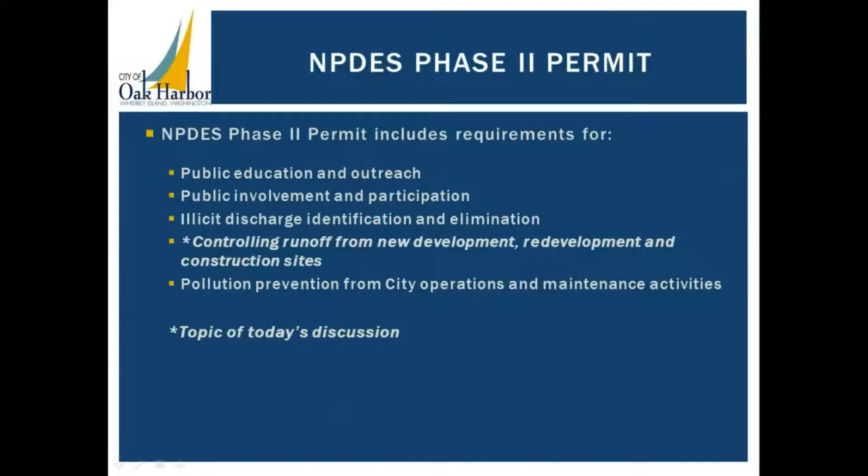So we have 5 basic requirements of our NPDES Phase 2 permit, and that's stormwater related. We have to provide public education and outreach. We have to have a program for public involvement and participation, a program for illicit discharge identification and elimination. We have to have a program for controlling runoff from new development, redevelopment, and construction sites, and that's the topic for today's discussion. And then the final one is we have to have pollution prevention measures from our city operations and maintenance activities.

So in 2007, we were issued our first NPDES Phase 2 permit. It was good for 5 years, and that required us to allow LID practices. Then in 2009, based on a Pollution Control Hearings Board decision, the permit was modified to require us to implement LID whenever it's feasible. And our current permit, which was issued in August of 2013, states that no later than December 31st of 2016, we shall review, revise, and make effective our local development-related codes, rules, standards, and other enforceable documents to incorporate and require LID principles and LID best management practices.

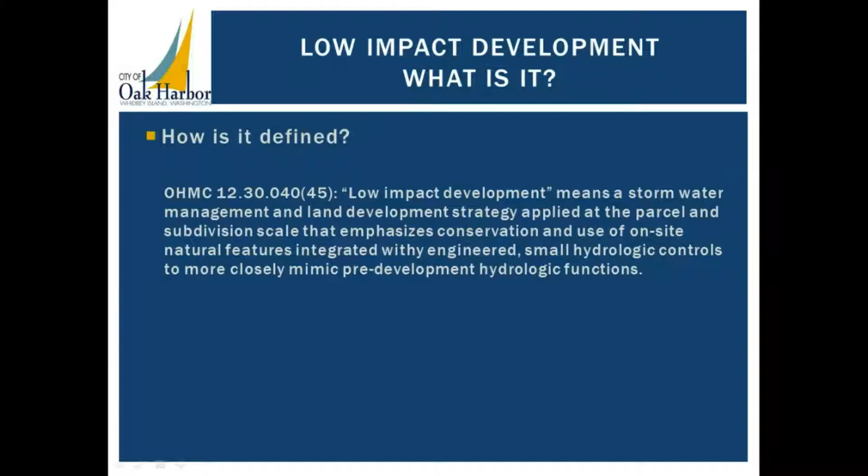So what is low-impact development? Oak Harbor Municipal Code has a definition that states low-impact development means a stormwater management and land development strategy applied at the parcel and subdivision scale that emphasizes conservation and use of on-site natural features integrated with engineered small hydrologic controls to more closely mimic pre-development hydrologic functions. What does that mean, really? Simply put, low-impact development requires that most stormwater stays on site when you're doing a new development.

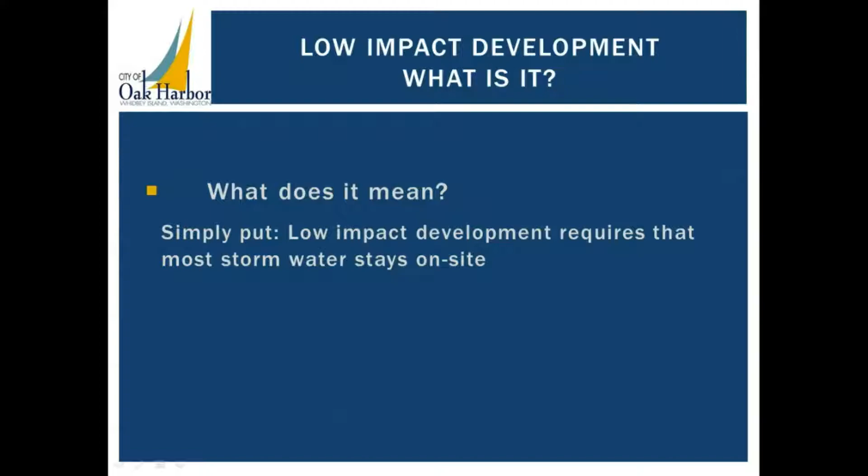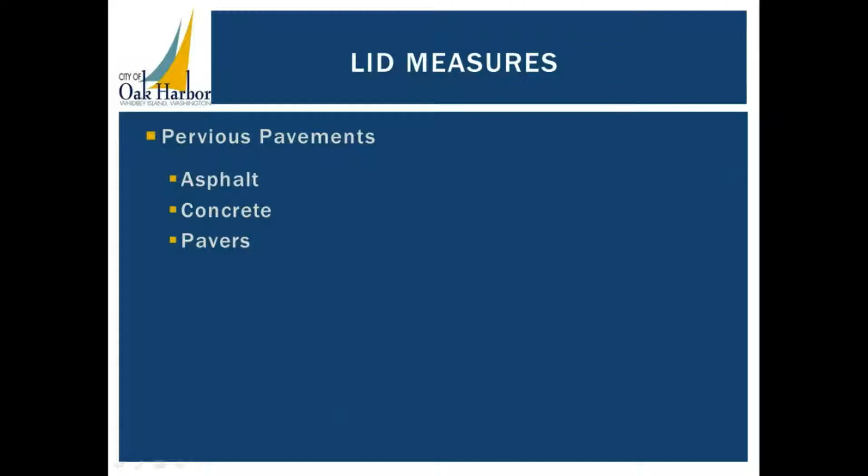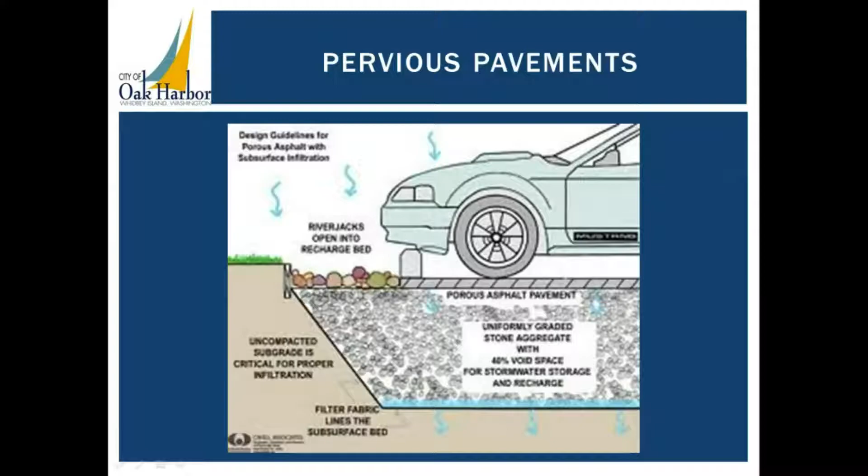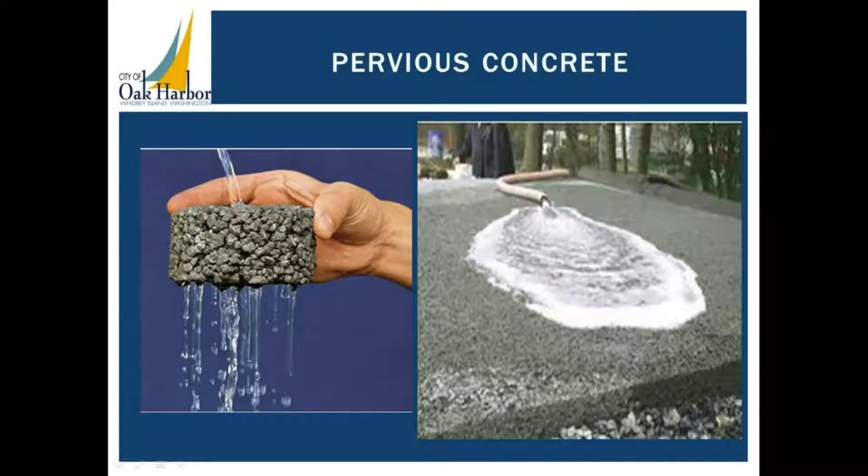So some LID measures are pervious pavements - asphalt, concrete, and pavers. This is just a schematic of what pervious asphalt would look like, how it would be constructed. Pervious pavements are one of the workhorses of LID development. Here's some pervious concrete, we have some out at Fort Nugent Park. And the water basically doesn't leave that concrete area if it's working as designed. And pervious asphalt. Pervious pavers are another option if people want to go that way, but we don't see too much of that.

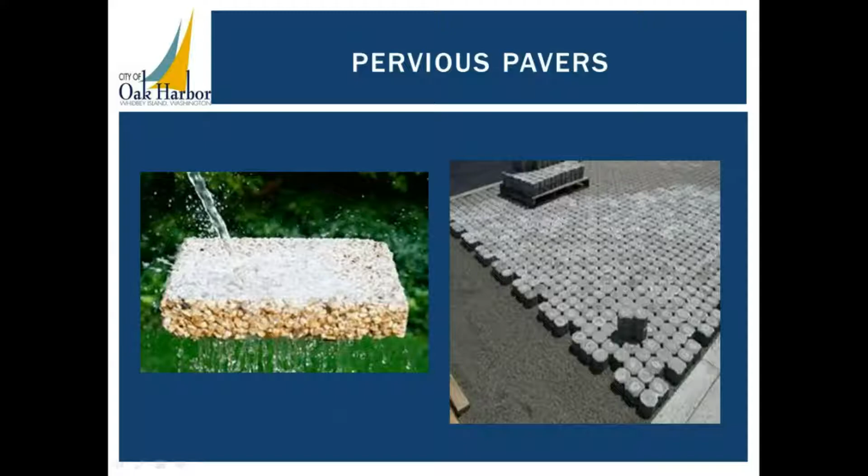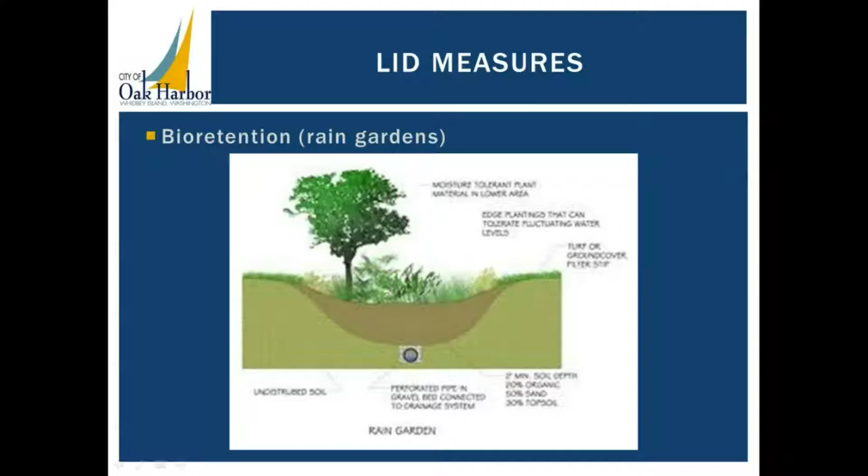Another workhorse of LID is bioretention, also known as rain gardens. They can be street side in the public right of way, or they can be on private property. We'll talk a little bit more about that later and some of the challenges with each.

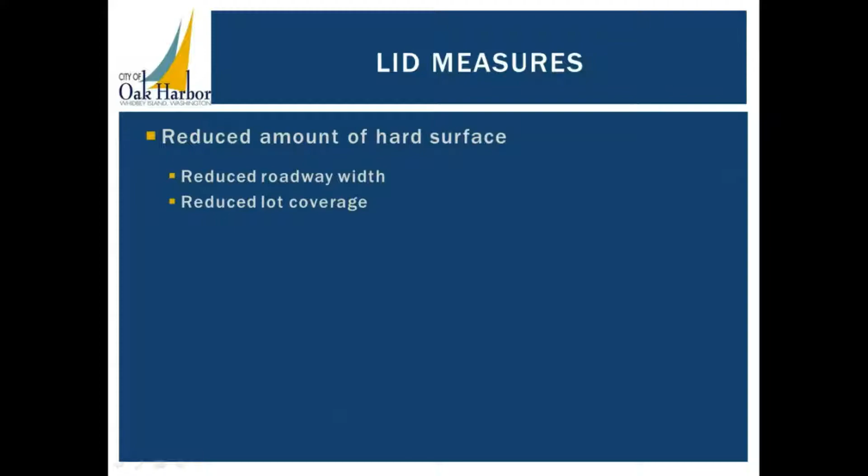Another LID measure is reduced amount of hard surface, such as reducing the roadway width or reduced lot coverage. So many LID developments have very narrow roadways, which can present some challenges.

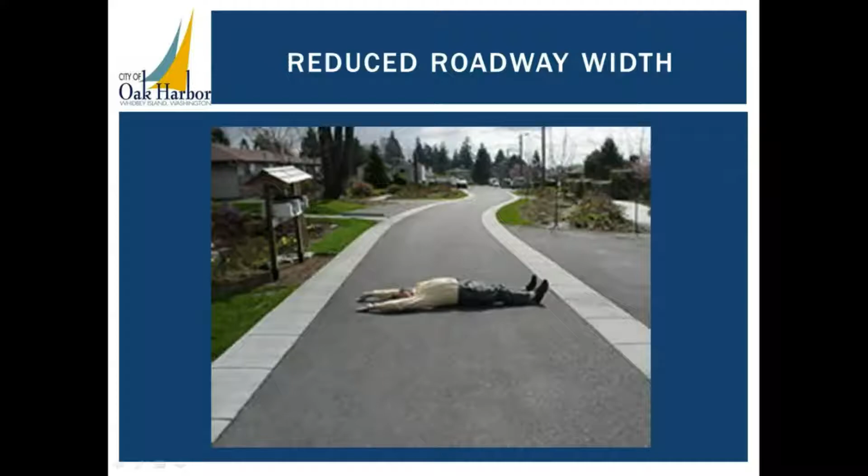If that's still - yeah, no, you see his beard. It can present some challenges making sure that there's adequate access for fire trucks and solid waste collection. And just people, yes, and just people.

Some ways that DOE has suggested that we can reduce the hard surfaces on lots are shared driveways and those kinds of things.

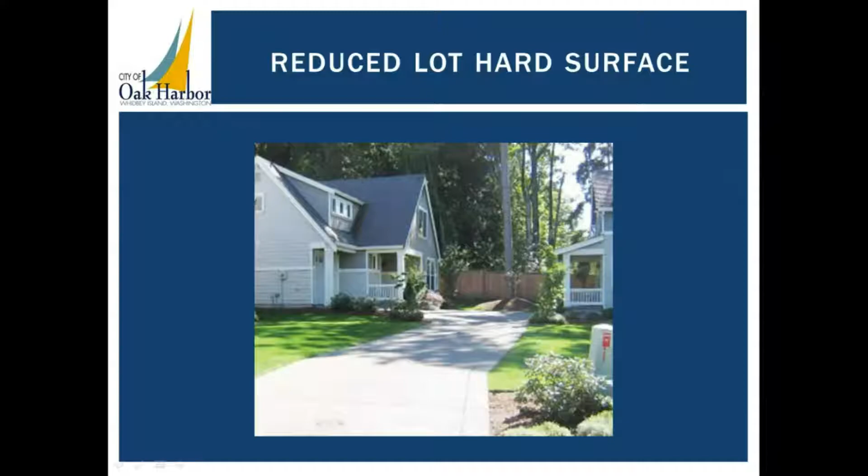DOE has suggested a dispersion area, which is an area left in its natural state when developing a subdivision, where stormwater can be directed to disperse. It means leaving a large area of the subdivision undeveloped.

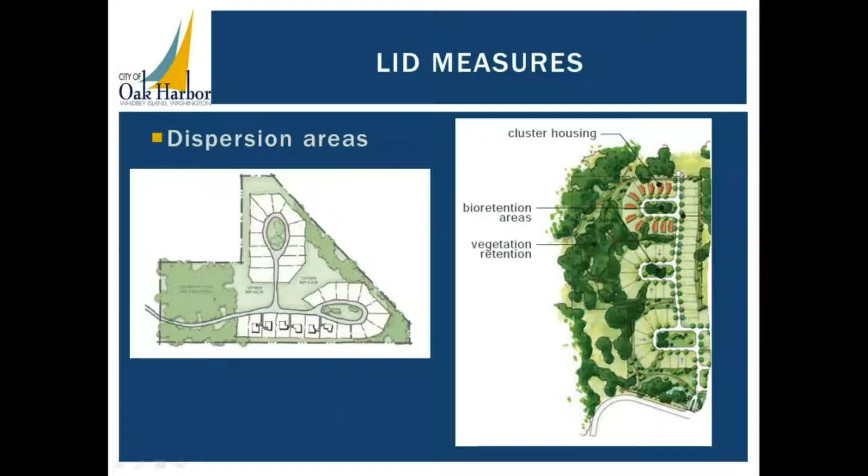This only applies to new development and redevelopment, not existing houses like my neighbor's and mine, even though we get a lot of runoff from both. His is pumped out of the backyard. It wouldn't apply unless the house were torn down and the property redeveloped.

The more common application in redevelopment would be in a commercial setting. The examples Kathy's shown so far are just residential, but keep in mind this also applies to non-residential development.

I'm going to turn this over to Dennis now to talk about our efforts to date. Are there any questions so far?

Just a bit of background: does modifying this to require on-site handling, meaning no off-site discharge from an individual property, still require installation of a detention facility? Generally, yes. But if you're going through all the source treatment and theoretically don't have off-site discharge, why are you going through on-site stormwater control?

Each design will be very different depending on the soils. The DOE is requiring intensive soils investigation as part of the early part of the project. They have to do a soils map showing where water can be put back into the ground. In some cases, water can go back through pervious pavement and bioretention; in others, they'll need both that and ponds.

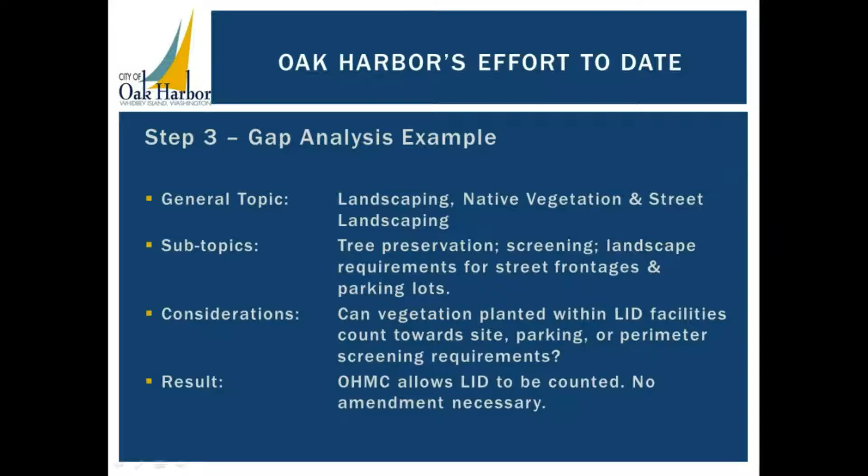So to make it easier, let me give an example. The general topic I picked was landscaping, native vegetation, and street landscaping. The subtopics prescribed by the Department of Ecology included tree preservation, screening, and landscape requirements for street frontages and parking lots. And the consideration was: can vegetation planted within the LID facilities, such as bioretention facilities, count towards site parking or perimeter screening requirements? So you have to ask yourself, does your code address that consideration? In our case, yes—we do allow LID to be counted towards the vegetation included as part of parking or perimeter screening. So we're essentially checking the box that says we've addressed this consideration, documenting where it's met, and moving on to the next one.

So that's been our process to date. The documents we've been using for this exercise—obviously the Oak Harbor Municipal Code carries most of the weight because of the work done about 5 years ago. We've got regulations in all of those documents that potentially could or should deal with LID. The last one is the comprehensive plan, which is more policy-oriented, but with our most recent update, we've thoroughly addressed low-impact development in our policy for the comp plan.

So the next step is step 4, which is what we're entering into at this point. Brad and I have been locking ourselves in my office working for stretches of time to see where in those documents we have existing code that addresses those considerations. We've got a 24-page document that identifies each consideration and the code that sometimes appropriately fits or addresses it.

So what that's doing for us is identifying the gaps. Then we ask: is there some way we need to address that gap? Are we addressing it in some other way? Can we amend or change a code with some wording to address that consideration? Or if we don't feel a change is necessary due to a conflict with another regulatory document we've adopted, we document that and indicate we're not going to amend the code because it would conflict with that document. That's pretty much the step we're engaged in at this point.

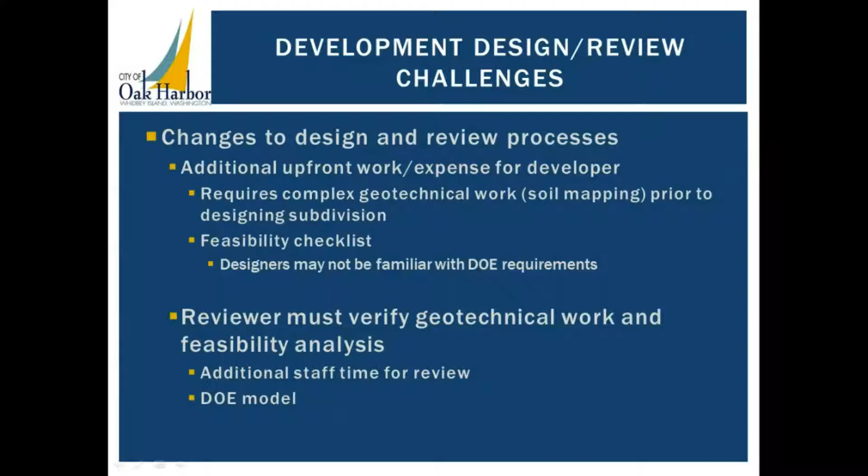There's also a feasibility checklist they're going to have to go through. Remember, pervious pavement and bioretention are the workhorses of LID. They'll have to go through this feasibility checklist based on the soils mapping - can they do pervious surfaces, how does bioretention fit in - and then work down through other LID measures to see if those will work. That's going to determine the size of any on-site pond.

There's a couple lists depending on the size of your project, and you have to start at the top. The first thing that applies to your soils and project you have to use. If that doesn't apply because of infeasibility criteria, you go to the next item. Pervious pavement and bioretention are actually the second items on these two lists, but the first item in each list is going to be largely infeasible for most communities. So we already know pervious pavement and bioretention would be the workhorses for most LID developments.

One of the challenges is we're not sure that a lot of the engineers and designers understand what's coming. Brad and the engineering staff attend a lot of trainings from DOE on this issue, and they come back and say they don't see many consulting engineers at the classes.

So this is going to be new to them. It's going to feel very different and feel like we might just be being difficult because we have to require that information, the soils mapping. That has to be submitted with the application in order for us to stay compliant with our permit. So it's not that we're not trying to be helpful, it's that we have to have that information.

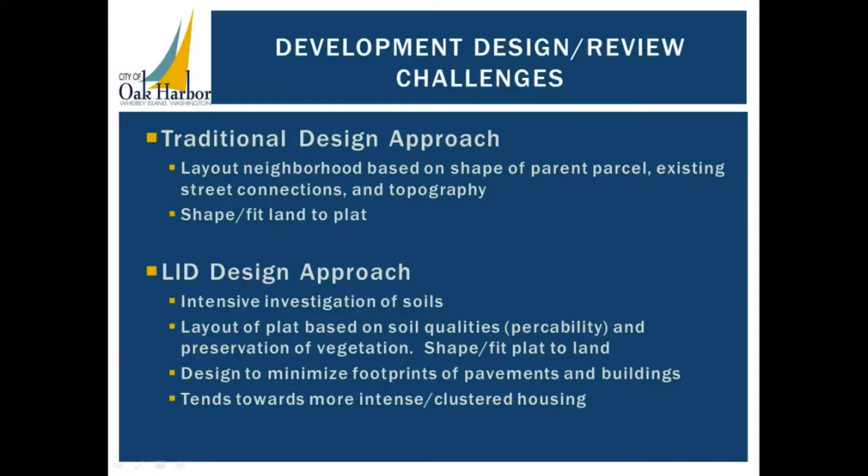In the traditional design approach, the layout of a neighborhood is based on the shape of the parcel of land, existing street connections and topography - basically they shape the land to fit what the developer wants. In the LID approach, which is what we're moving to, there has to be investigation of soils, and the layout is based on soil qualities and preservation of vegetation. Essentially we're shaping the plat to the land and looking at designs that minimize the footprints of pavements and buildings, trending towards more intense and clustered housing.

So the one on the left is more traditional, the one on the right is most likely what we're going to see developers moving towards. These are examples I pulled from the low impact development manual. We're still going to stick with a gridded street system. The main difference is these have the same amount of lots, except they're much smaller and tighter together on the right, and they've reduced the amount of road.

The low impact development manual and DOE manual don't really get into street grid layout and transportation. They like to see streets minimized, but we have to balance our transportation system with LID, so we're not going to see a lot of dead ends.

So now it's my turn. But before I get into that, I'm going to go back to this picture. Something we've touched upon a little bit, but this is a great graphic example of it, is cost to the end user. If you look at the example on the right with all that green area, that's most likely ending up in a tract owned in common by the HOA. Somebody's going to have to maintain that.

While it's typical to have drainage tracts and other types of tracts in subdivisions today, I think it's safe to say they're much smaller than what we see here. As we all know, areas that aren't maintained become holding places for trash, etc. So there's an increased cost at the back end of the process for the homeowners associations as well.

Can you hold that for just a second? Sure. But the city doesn't have any authority to enforce homeowners' requirements for maintenance. We don't, unless it's in an area where it's also part of a drainage facility which is connected to our public system. My point is that at some point, someone's going to complain if it's not being maintained, and somebody ends up addressing that particular problem. But you're right, we do not enforce CCRs and the requirements.

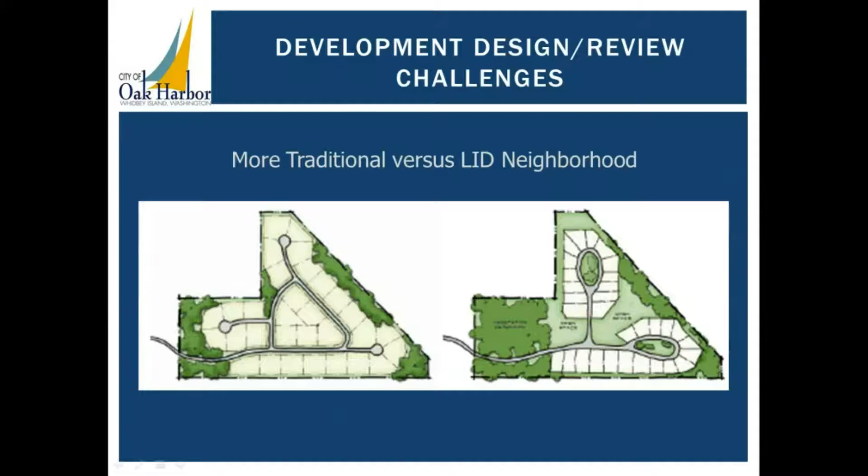Smaller setbacks. Brad has shown us some examples of some 3-story homes that I don't even want to contemplate because they're just, well, they're not Oak Harbor, that's for sure, but it's hard to envision a product like that in our community because it has to be one that people are going to buy. That's another part we're still struggling with. It's not really in our purview, but we're still trying to figure out how this all works. And so that's the housing structure change.

It doesn't work very well when we're talking about single-story houses for folks getting up there in years who aren't looking for stairs. How does this all work when we have an increasing senior population? If we're still talking about single-family housing, they want single-story homes. That's pushing everything out, making a greater footprint on the lot. So competing goals, and again, trying to balance those things.

Speaking of competing goals, how is this going to really be in conformance with the Growth Management Act? Is it going to be necessary for us to increase our densities to meet LID requirements? Yeah, we can do that. We can say we can build a more dense single-family product. That's going to skew our overall housing mix, and we have to keep our eye on that.

But really importantly, we have a requirement to provide a range of housing for all needs and all income levels. So that's not just compact single-family standalone homes. We have an obligation to plan for and provide land for things like government-assisted housing, low-income manufactured home products, multifamily housing. And I think it remains to be seen how LID factors into some of those site planning challenges.

Another big takeaway for the council today, I think, is that unlike many of the code projects we work on, where we feel reasonably comfortable that we've gotten most of the answers to the questions before we come to you with it, there will be some things that I don't think we'll know the answers to until we start working on actually implementing this. And frankly, we're not very comfortable with that.

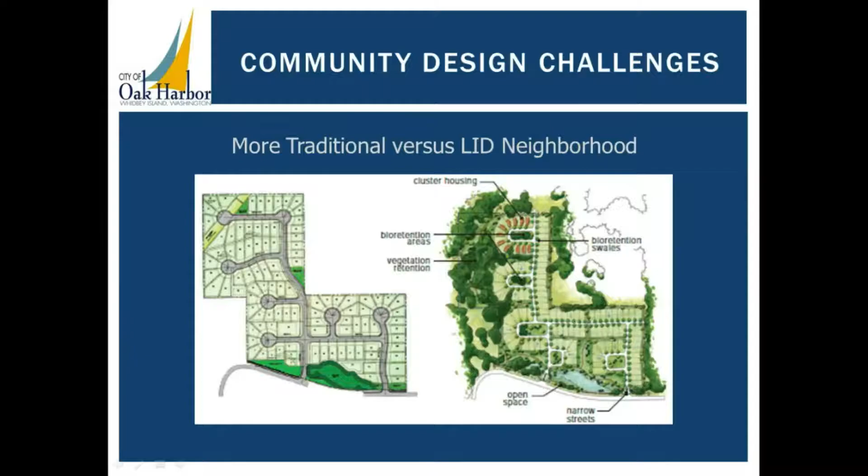So again, here's a similar example to the one that Brad previously provided. You can see the difference in layout and some of the issues we've already talked about.

I'm going to talk about what we see as maintenance challenges once these developments are put in the right-of-way, which Public Works is responsible for. Pervious roadways and sidewalks require new specialized equipment to maintain, and we don't have that. It's going to require additional staff because it'll take more effort and time. And then the bioretention, if it's in the right of way, who's going to maintain that? To keep it attractive and functioning as designed, it requires a lot of handwork, weeding, and effort.

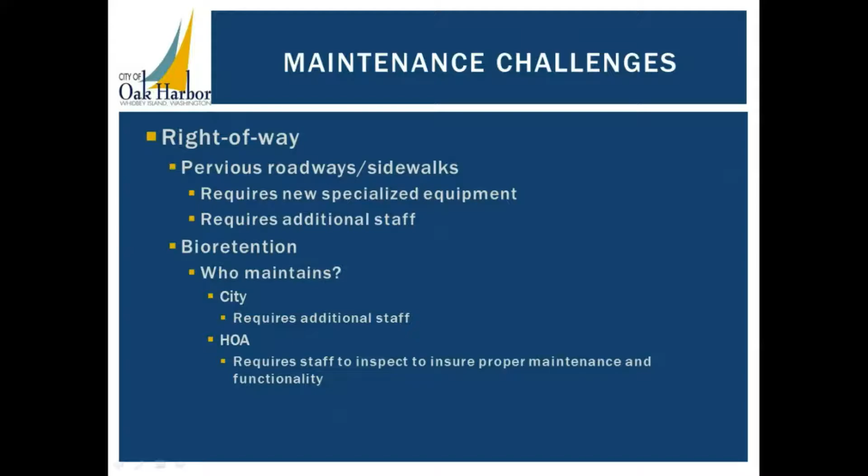If it's city staff, it's going to require a significant increase in the amount of staff we have to do that. And if we put it on the HOA, it will require staff to go out and inspect it periodically to ensure proper maintenance and functionality. We'll have to look at that on a case-by-case basis. But if we're going to allow bioretention in the right of way, there has to be a decision as to who's going to maintain it. There will be an increase in city staff effort—it's just a matter of degree, whether we're maintaining it or just inspecting it periodically.

Question? Oh, I do too. Sorry, excuse me, go ahead. Oh, okay, well I am.

I know you don't have a crystal ball, but based on trends, you know this well. How often do we get a new development with these new right-of-ways and new things that need to be done? When do we expect we'll need an upgrade to maintenance equipment and staff for public works to maintain these neighborhoods? How often does that happen?

Well, it's a great question, and actually may be somewhat of a saving grace for us, because as we all know, new subdivision applications have really slowed down over the last half dozen or more years. The one or two we have in process right now—one came in under the existing rules, so we're not talking about that for them. It's hard to predict, but I think we'd reasonably expect to see a couple applications probably after the first of the year, if building is taking place commensurate with the new squadrons coming.

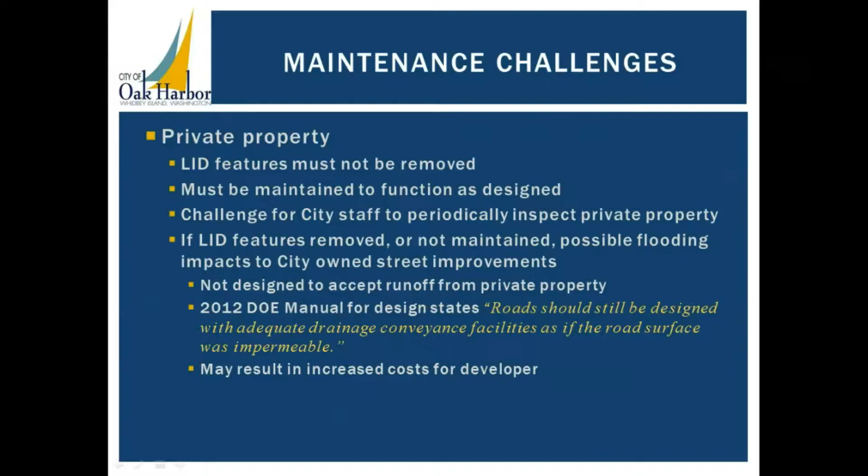The next point goes back to something Councilmember Almberg brought up about if they install all of these LID features, are they still going to have a detention pond? Well, they might, but there's something else: they're going to design the development so that the majority of the water stays on the site.

Brad and another engineer, Alex, found a statement in the 2012 DOE manual that says roads should still be designed with adequate drainage conveyance facilities as if the road surface was impermeable. So DOE is suggesting redundant drainage systems.

My concern is, if we don't do that, and the LID measures on private property are not maintained, or they don't function as they were supposed to, we're not going to have infrastructure in our street system to handle that increased runoff. But I have a real hard time increasing the cost to development and then asking them to put in a redundant drainage system for our roadway.

Part of the supposed cost savings of LID was that you would not be putting pipes and catch basins in the road. And here they have a statement telling us we should be doing that in addition to all the LID. We've already found out through experience that even when you don't do the pipes and catch basins, LID is more expensive than traditional. So if you tack on the traditional system on top of LID, you're talking about a dramatic increase in cost.